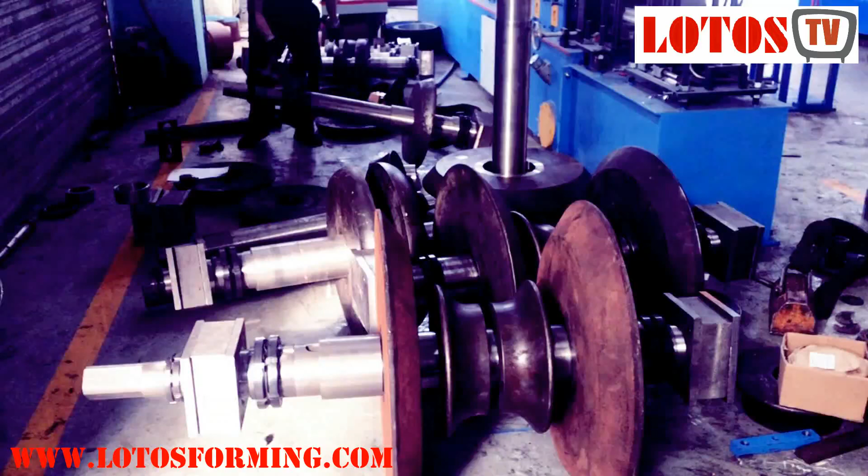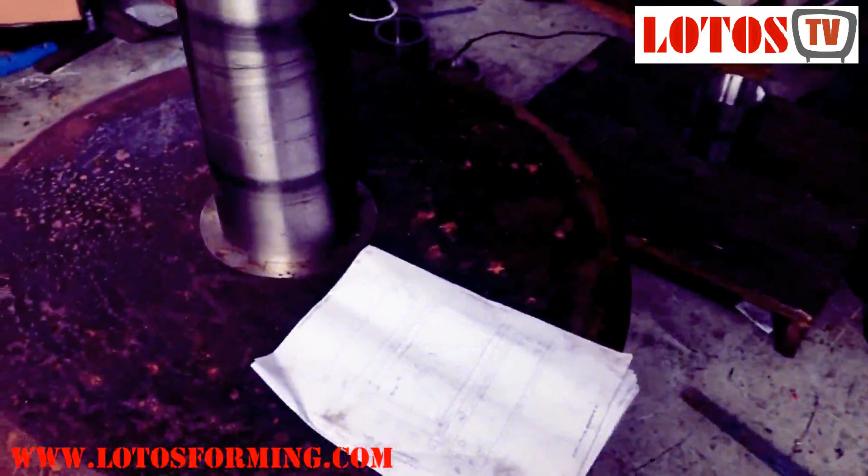Hello everyone. Today we are installing the roller and shaft for a heavy duty forming machine. It handles material up to 10 millimeters. You can check the roller - as you can see here, this is the A4 paper. You can check the diameter of the roller, it's double the size of the A4 paper.

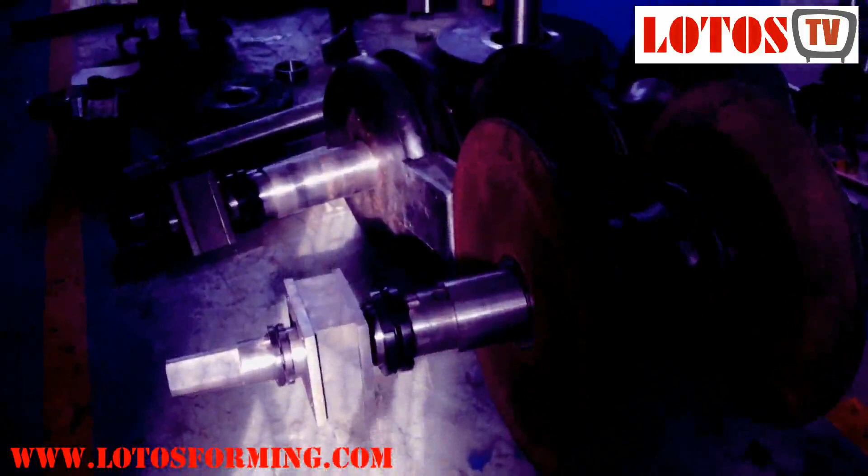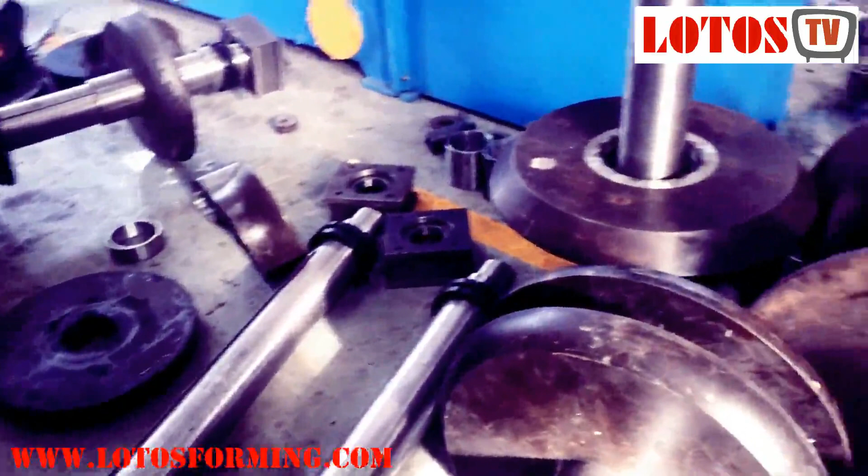This machine is under fabrication for some master customer. Check all the rollers installation. It's very heavy duty - the shaft is 145 millimeter diameter, and we check the roller size. I put my hand here, then you can realize it's almost this big.

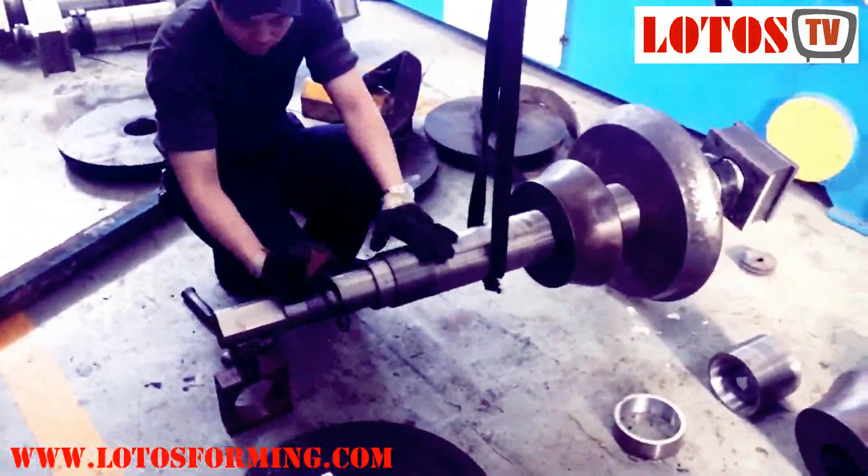Taking some video during the installation of the roller inside. You can realize the large forming capacity for these forming machines. From 0.4 millimeters to 10 millimeters, any profile you have, you can design a forming machine and we manufacture it under your demand.

Later during testing and finishing, I will also show you the final product.

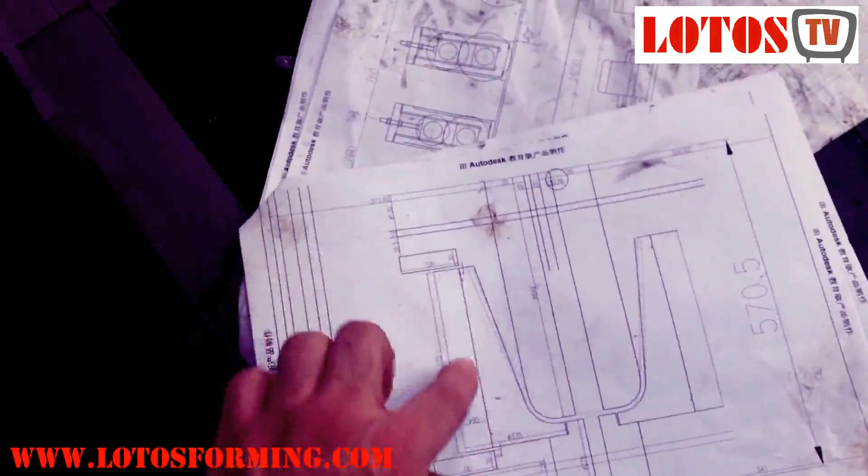These rollers - up roller, down roller, and side roller. These two side rollers will be like this. This is the side roller, then it installs here. You can see, this is the up roller, and this should be the down roller.

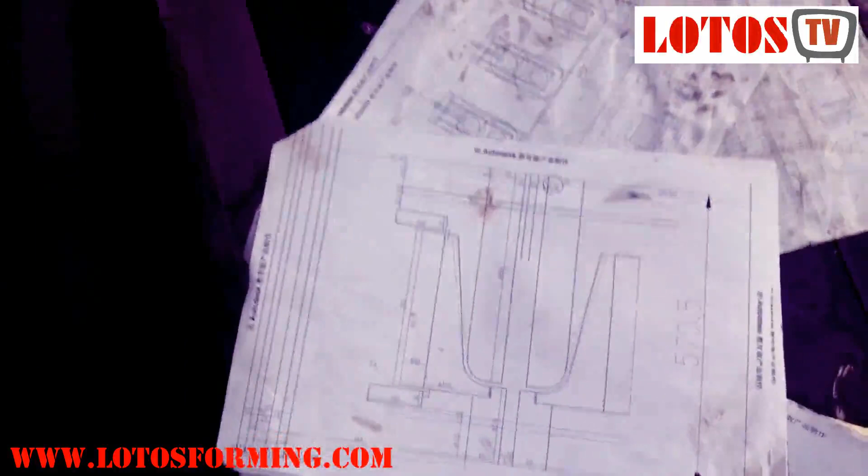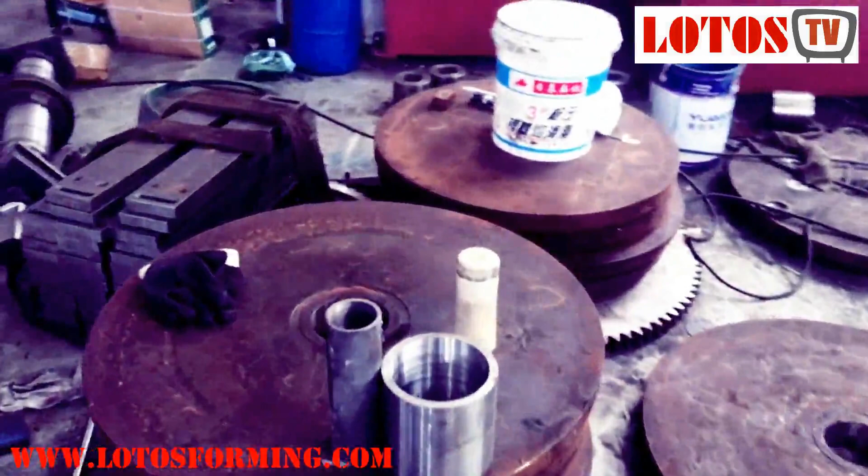And here you can see the profile, 8 millimeter thickness profile. Up roller - and to make it more clear for you: this one is the up roller, that one over there is the down roller, and this one on the side is the side roller.

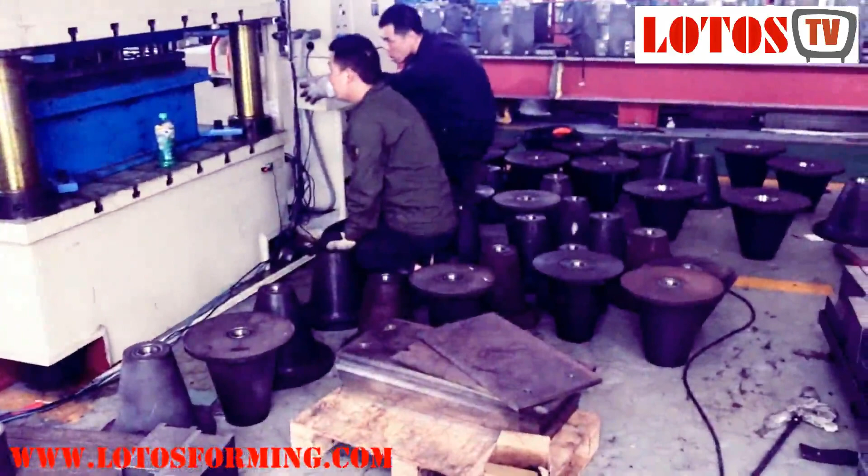I'll show you again - side roller, how you install it.

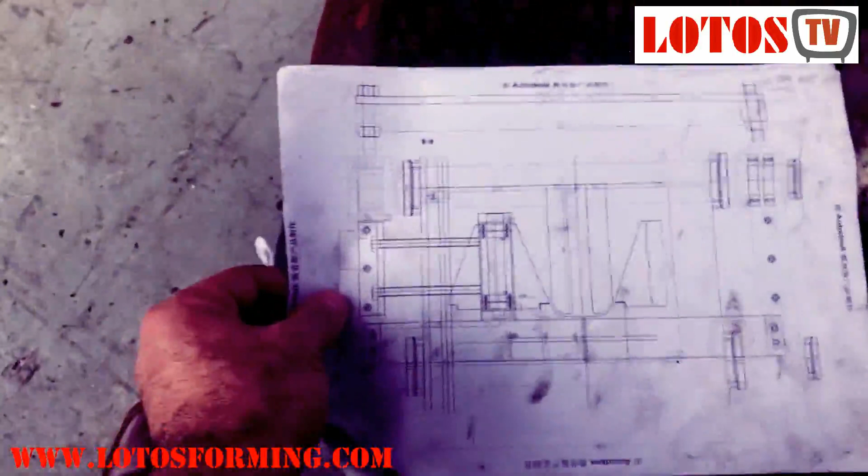Okay, this drawing page, everything is clear. Two side rollers, you can see - this is the side roller here. Down roller, down shaft, upper shaft, up rollers, connection, rolling stand.

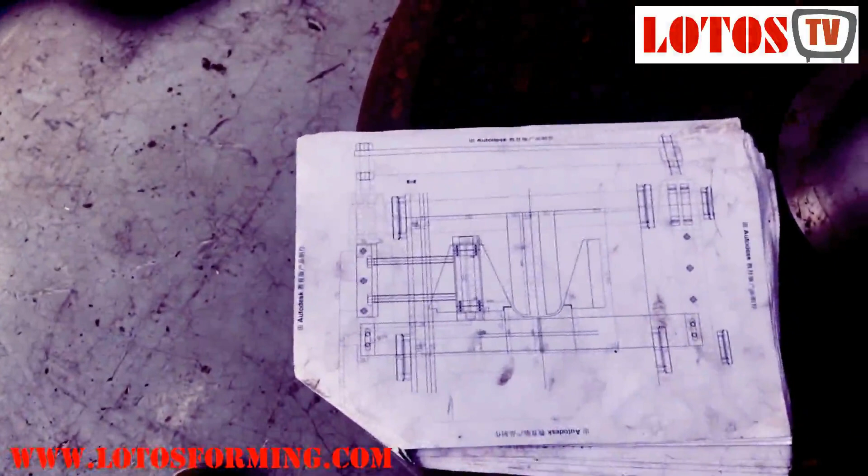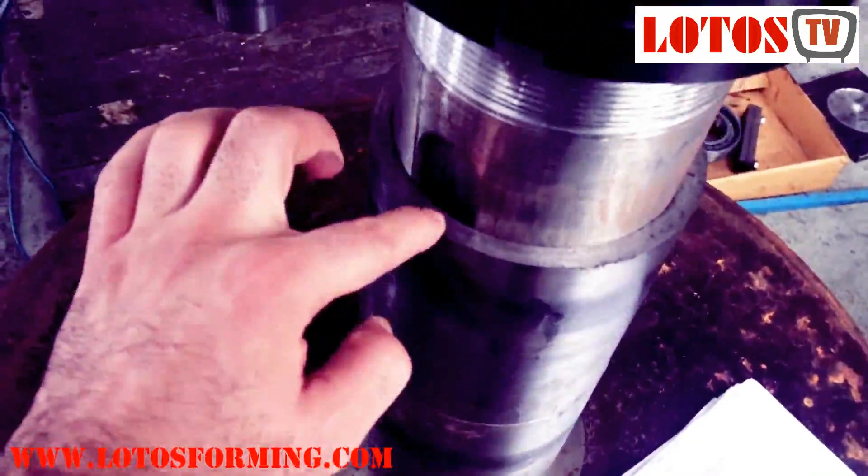Sleeves - thickness is almost 8 millimeters. Spacer bush, bearing, all the units.

Inside the shaft, based on this drawing - two on the side and two in the middle. Between these rollers there is a spacer bush, see, on each side.

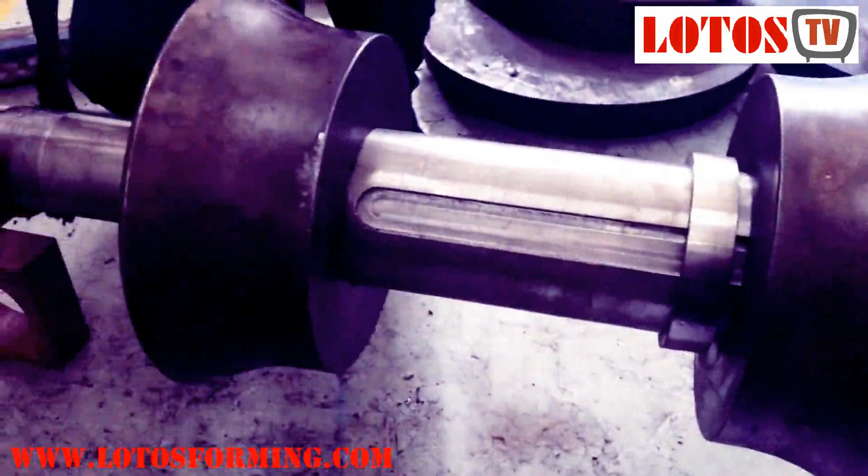The bigger side is here, and this is the big roller on the left. One spacer bush here, 130, if you can see. Here, the second roller, and after that will be again one big roller for the left side.

One more time I'll show you.